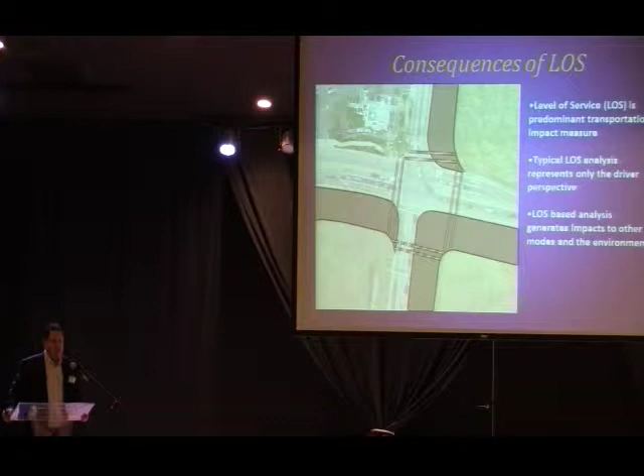And we do that because we have this policy about level of service in our general plans. We put in some assumptions into the computer, and the computer tells us that your roadway needs to be 4, 5, 6, 7, 8, 10, 12 lanes. Oops, it now needs to be 13. And we try to build our way out of congestion.

Let me tell you, the 26 lanes down in San Diego still results in congestion. They could make that 48 lanes, and it still results in congestion. You won't be able to build yourself out of congestion.

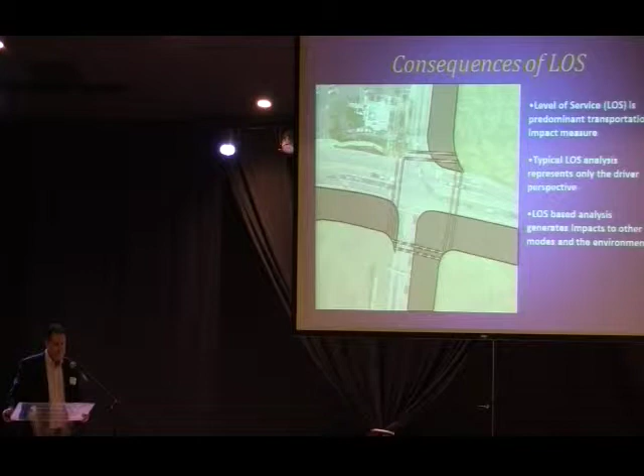So what I'm encouraging you to do is to consider first starting with designing your roadways for people, and then accommodating the automobile. And when you first design for people and place, you create a much different environment for users.

To an economist, level of service F means you're getting a lot of bang for your buck. You're moving a lot, that roadway is being well used. But here's another crux: the wider the roadways, the more infrastructure and maintenance costs we spend on them. The more speed is on the roadway, and as a result, they become less safe.

We're moving them twice as fast, but they have to come to a red light just like the other one, and how fast they go along the corridor is very indifferent because the traffic signal is the greater influence. So one thing I always like to say is wide roadways often disconnect people and communities from their potential. Every year we're killing 32,000 people on our roadways in America. It's a phenomenal, traumatic number, and it's staggering. Incomplete streets exist, and this is why people are dying.

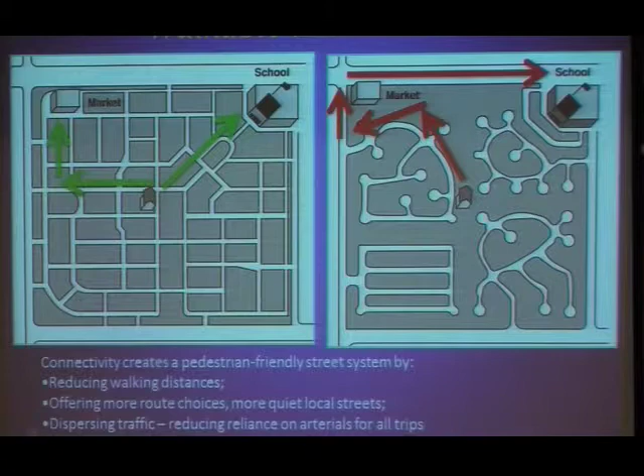But when we talk about connectivity, how many of your subdivisions are connected to each other? Or do you have walls around them? Are they cul-de-sacs, dead ends? Is the only way in and out of your subdivision through a 4 or 6 lane roadway? Or can you get to the school and the market through a nice grid system, like exists in this neighborhood?

And when you look at economic vitality, transportation is a great indicator. So how do we provide for demand? We have to start managing it better. We have to stop providing for demand and start managing it and providing choices—choices in routes, choices in mobility, choices in destinations.

We have to bring a bunch of different disciplines together. It's not just planners and engineers, it's public health, it's schools, it's advocates, it's smart growth, it's urban equity, it's economists, it's historians. And I'm going to let you in on a little secret.

But what else can we be asking our street to do for us? Because a lot of times we're just giving it more pavement and providing more capacity, but what other thresholds could we be looking at for our streets?

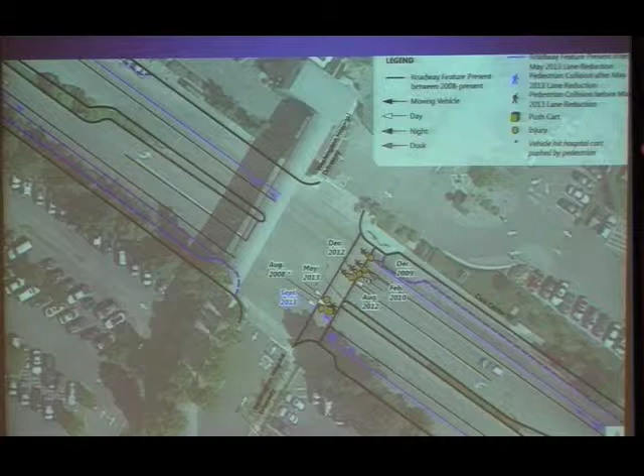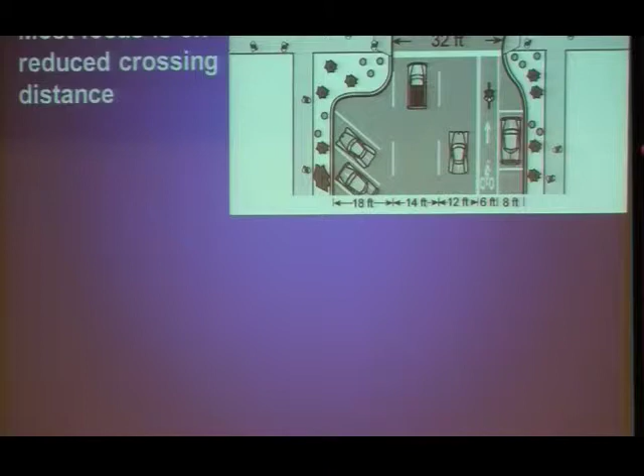It also necessitated me taking a different approach to getting something out there rather than an 8 to 18-month program to find a solution. We did something in about 6 weeks. We knew from our theory that creating bulb outs to reduce the crossing widths helped improve the safety and vulnerability of pedestrians crossing, and we also knew it increased the visibility of motorists seeing those pedestrians.

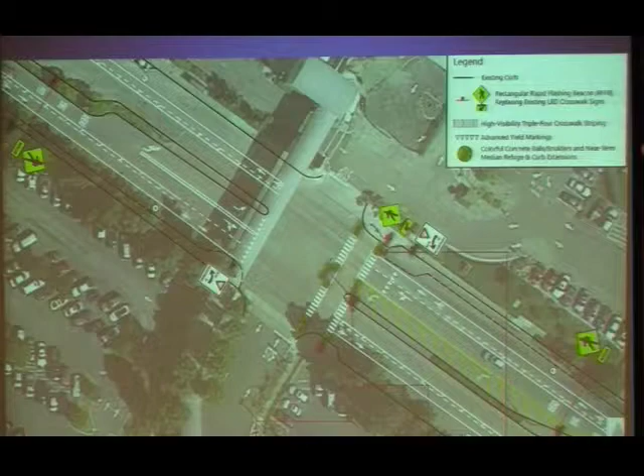So we came in and reduced the roadway from 4 lanes to 2, closed down the left turn pocket, and created bulb outs with planter boxes. They're $400 water-filled plastic boxes with flowers that grow nicely and self-water, so there's almost zero maintenance. If a car hits one, it might bend their bumper, but it's going to save a life. It narrows the roadway and gives visual friction, slowing travel speeds from 40-45 down to 25-30 miles an hour. It increased the yield percentage for motorists stopping for pedestrians from 15% up to about 85-90%.

We also used rectangular rapid flashing beacons, but we realized we also had distracted pedestrians. They had their headphones in, reading medical charts because they were going from one hospital to the other across the street, or to the BART station. They were reading a book, an iPad, medical charts, and were just distracted pedestrians. So what do you do?

We didn't force them to push the button. We just put a motion detector up there, and as soon as they walked through that path, the lights all started blinking like a cop car, and all the cars came to a complete stop. So we didn't rely on the distracted pedestrian to do the right thing, but told the motorist, hey, you might have a pedestrian in this corridor, so be on the lookout.

So we closed down this left turn pocket, put advanced yield lines, and even created a new standard of a crosswalk outside the crosswalk with little jack-o'-lantern teeth on the outside. We use the regulatory sign, yield to pedestrians here, which makes it look official, and there's a car stopping at the yield line.

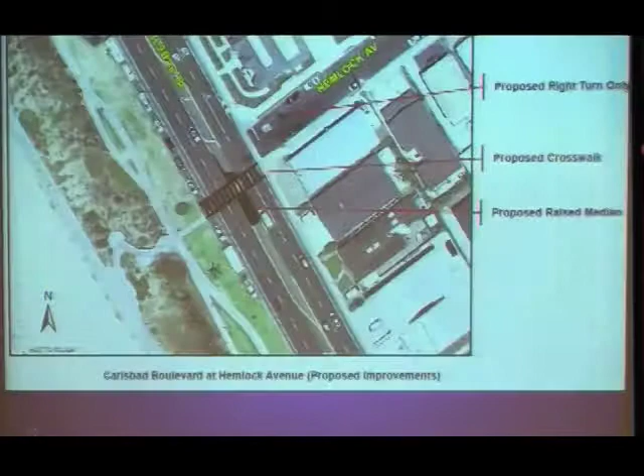But for an elected official, this is a great way to sell them on a concept. Here's a roadway, hotel resort over there, 7-Eleven on the other side of the roadway, the beach down here where I'm at. I'm in the Pacific Ocean.

The 7-Eleven has Slurpees. The beach does not allow alcohol. So some people put alcohol in the Slurpee and take it down to the beach. But they got to cross that street to get to the Slurpee machine and then down to the beach. And you got to go frequently because your Slurpee goes down.

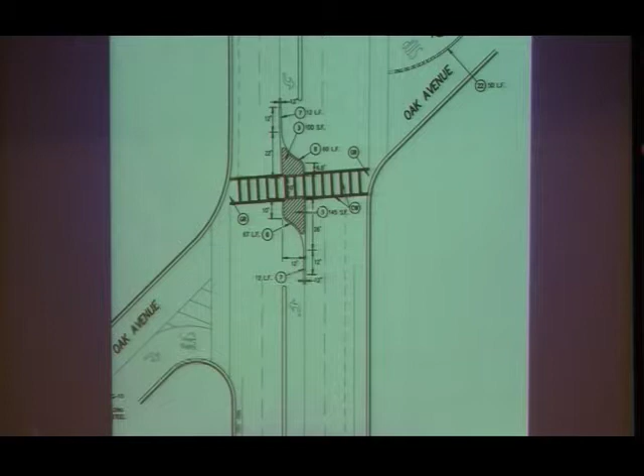So we put in a crosswalk just like that across the intersection, because I was sitting out there one night with dinner with my wife, and I watched over 100 people an hour cross diagonally around that intersection. And I'm like, they're going the shortest path from curb return to curb return. If I made them go to the other curb and that curb, they would still cross diagonally through that intersection. People take the shortest path of least resistance, and this is the person using the street now.

Here's one in front of an elementary school. It looks a lot like this middle school. And it had a really wide street like this, and really wide streets induce speeding. The number one complaint I always got when I was a city traffic engineer is speeding on my residential streets.

So we took that street in front of that elementary school and we said, where that middle arrow is, why don't we do that? Oh my gosh, that looks just like what you guys did out here in front of Reading, or in Sequoia. But then we said, that's not quite enough, we still have some issues out here.

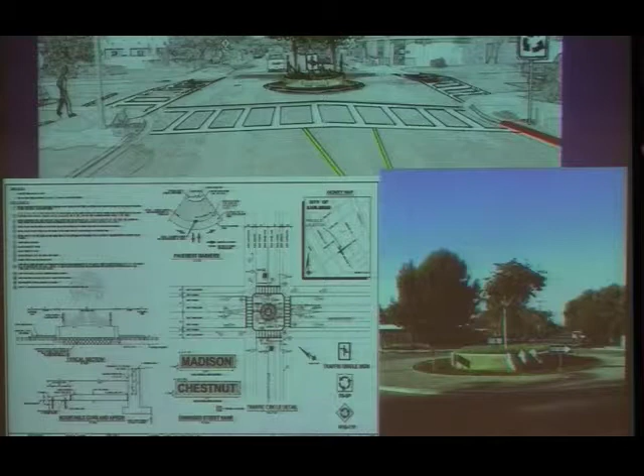And we knew traffic circles at either end of that school could help parents turn around. It could also help create a gateway feature at this elementary school. So we said, since we didn't have a lot of money, we used 8-inch ceramic domes. For about $4,000, while we were doing a pavement project, we put in this project instead of doing a concrete traffic circle.

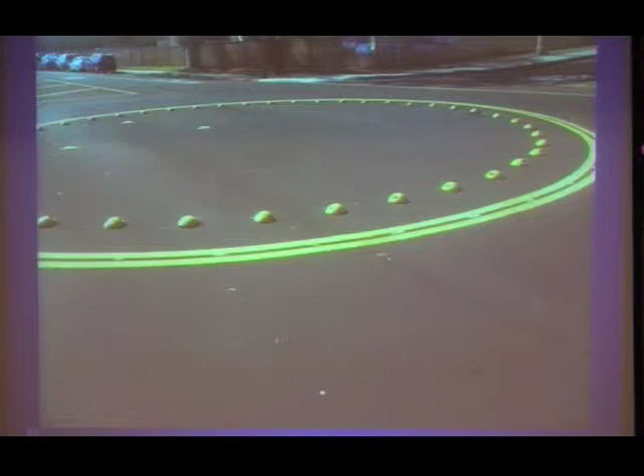So now people ride around that. They're just tall enough where it feels awkward to drive over them as a car. The fire trucks can go blowing right over them, a moving truck can go right over them. But now, mothers and fathers dropping off their children can make a U-turn and head back the direction they came from, rather than making a 3-point turn in front of the elementary school and running over your kid as you're dropping them off.

We had this curve that looks like an inside-outside, inside NASCAR curve. But before the bike lane was there, it was a 20-foot wide travel lane or 25-foot wide travel lane. And there's a high school about a quarter mile up the roadway. So you can imagine a 16-year-old trying to check out their parents' new car, see how fast they could take this S-curve through here, doing the inside-outside, inside move.

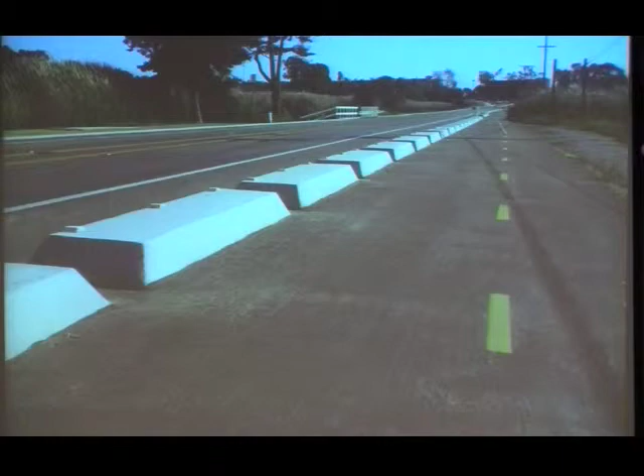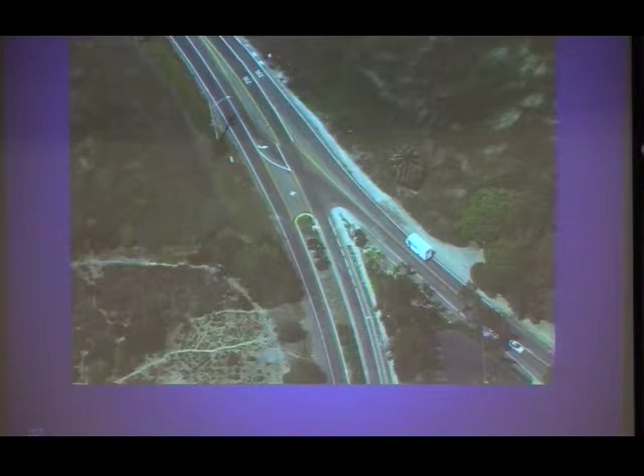And that same area connects to this intersection, and I call this a hairy intersection because I can't use the D word, dangerous. But it's pretty much an on-ramp for a freeway system. And this is what it looks like.

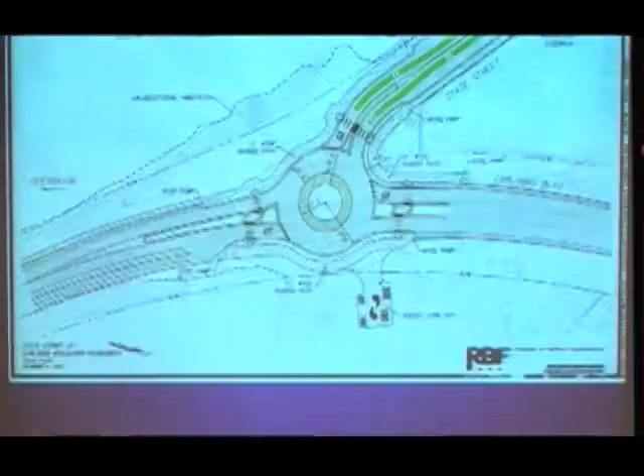And we know roundabouts have a great reduction in reducing collisions. You can't run a red light through a roundabout, and you're doing it at a slower speed. So even if you do make a mistake, it's usually a fender bender rather than an ambulance.

And then we said, you know that same corridor where we did the pedestrian crossings and the narrow travel lanes? What if that roadway evolved even more? What if we said, wow, that Pacific Ocean is an incredible tourist attraction. What if we help connect people to that tourist attraction by doing something like that?

And you go back and forth. One you should be drooling about, one you should be terrified of. Okay, so get back to it.

But then on that same corridor, they shut it down for a marathon every year. So there's lots of people that love experiencing that coast. So it's not like we have to tell people how to use that, right?

And when I was in Fresno, we shut down a whole freeway for a bicycle event that brought 470 different cities in 27 states to Fresno for a 3-day physical fitness activity. And 2,000 people got to ride 10 miles of a freeway. It's the first time it's ever been done in the state of California to shut down a freeway for a bicycle event, an organized bicycle event, not a protesters event like we've experienced in Oakland. And they've been doing it for 4 years straight.

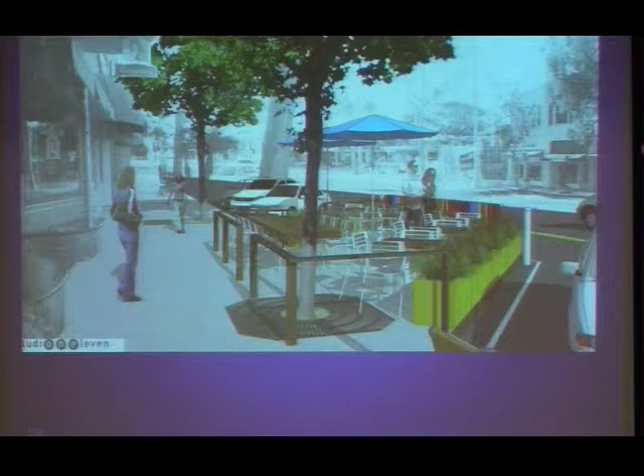This restaurant across the street wanted to do it. The restaurant down the street wanted to do it. Here's some in Long Beach. The businesses were able to expand in place, hire 2 new employees, and increase their revenues by 50%.

So how do we start with the end user's experience? Here's a roadway that used to be a Caltrans highway - it ran through Morgan Hill's downtown.

The town encouraged their restaurants to do outdoor dining, but then the Downtown Business Association said our patrons can't have a romantic conversation at the outdoor dining because the traffic is so loud and fast, so close to the tables.